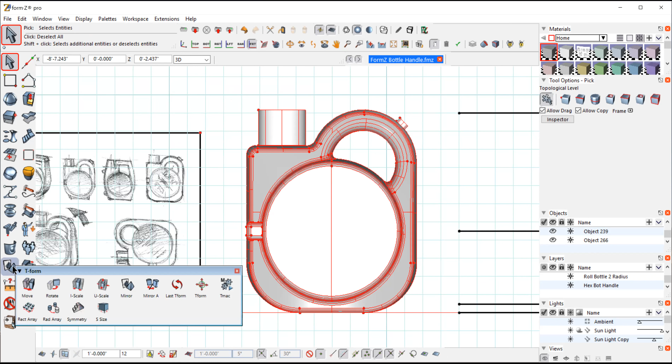So you can literally just sort of roll it forward and have an integrated foot area instead of trying to blend that into the side. So having this functionality turn like this. So we can have this nice, clean position when it's rolled on its side.

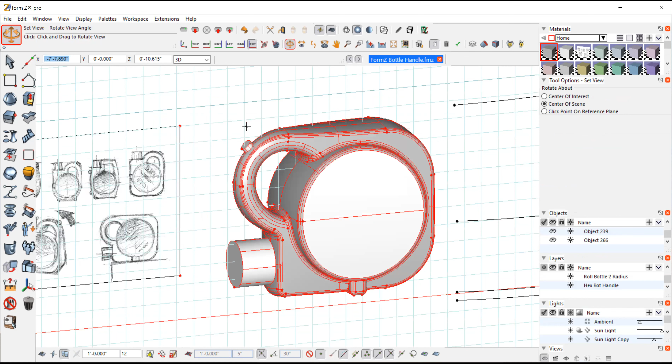And then the graphics, yes, the graphics would have to be addressed, whether they're on an angle to start with and they continue to remain on an angle as we turn it, or depending on how those graphics would be oriented in both directions. But it's a pretty nice design. It works pretty well because it's very difficult to integrate all of these features in the one bottle because a lot of things have to happen.

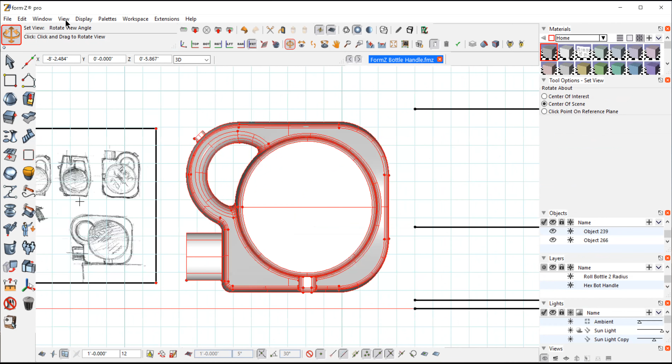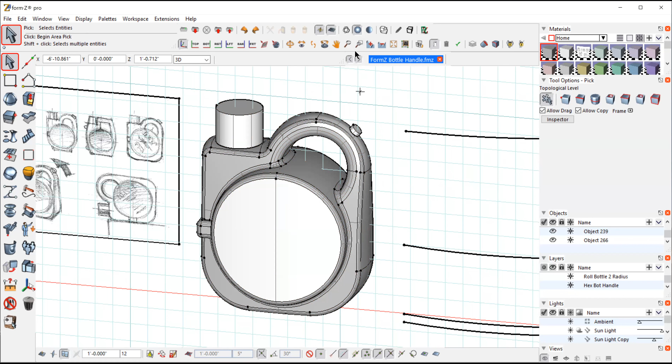Let me just bring this around again. So there's like 3 main things that have to happen. Obviously, we got to maintain this volume, which is hard enough to do as it is. We have our proportions I got from the category. So I'm following these proportions, roughly 9 or so inches wide, about 11 inches high, and about 5 inches deep, to try to get that to fit because it's a typical size for this 5-liter bottle.

So what we have to think about is the handle. The handle has to be grippable. It can't be a very large, wide, deep handle that integrates with the rest of the bottle. And then we have the area for the measuring cup, that plateau there where the finish is underneath, and then we have the pump. I'm not going to design that part. I just need to allow space for that.

And then we have our overall width, our 5-inch width. So all of these things are moving targets and they're kind of opposing one another because one part needs to be thin, other part needs to be wide. So it's kind of difficult to get all that to work.

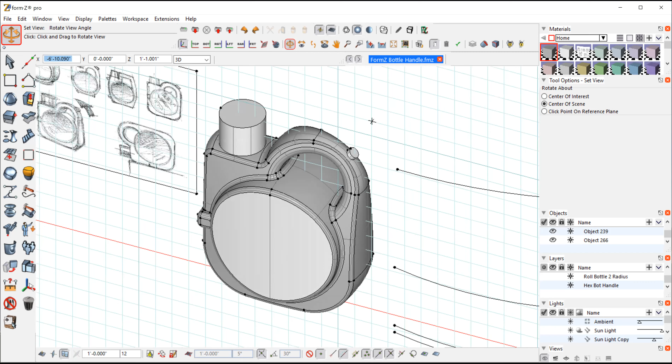So this particular approach, I'm building it in 2 sections. I have this center round kind of drum area, and then I have this whole outer frame, which is a different part. By separating the components this way, I can address some of these dimensions individually. Like I'm going to address the handle size and the finish area in one part, and then I can adjust this drum size to make sure I hit my volume. So working with these 2 parts makes it a little easier to work with.

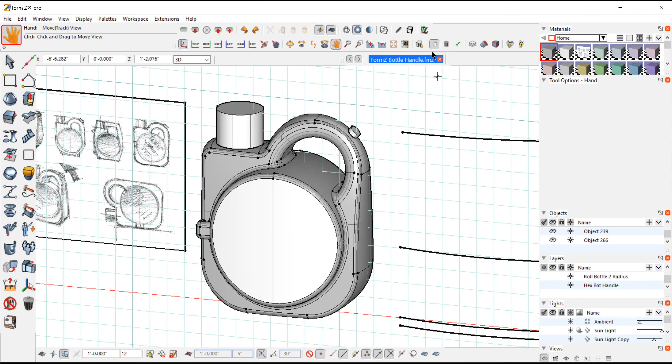So of course I'm starting off. I have my construction lines to create my overall shape. So I have that laid out over here. So here I'm starting just to do all the, like I said, I'm trying to maintain the simplicity by using these nice generous radiuses. So I started off with the handle.

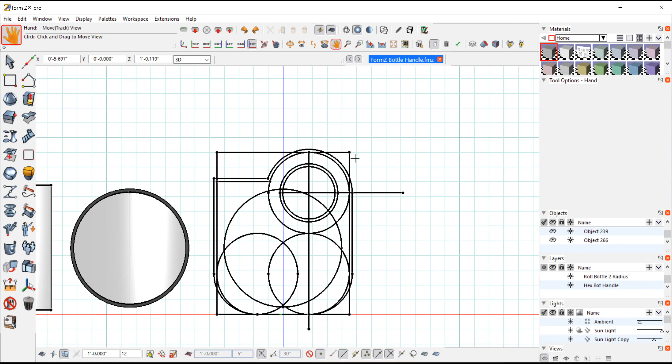From the front view, I wanted this round open handle. So I drew the outline of that circle, and then I drew the inside line for the clearance. So about how big that might be, 3/4 to an inch or so, and I'm going to do some radiusing to make that fit. So I started with that.

And then to maintain this circular theme that I have, I just brought down that exact same diameter on these 2 bottom corners to make those bottom corners the same diameter. And then I have my large circle in the center, which is going to represent that drum area in the middle, which will actually be a separate part. So that's just the beginning of the layout.

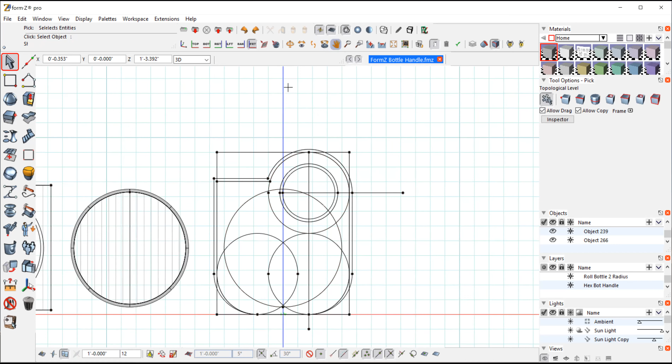So with that in mind, I go back to my 3D part after I have the 2D part laid out. And I know I'm working with that handle. So there's the handle over there on the left. So I'm trying to make this face for this inside part. So I'm going to loft that like I've done many other bottles, and I'm going to angle in that top one.

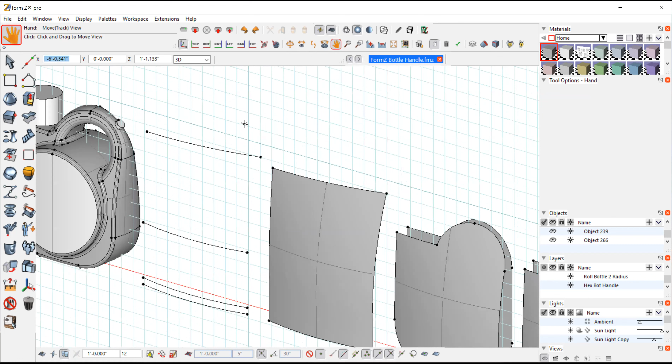You can see the top area here. I brought this upper right corner in very tight, so that's over by where the handle is. That's how I'm getting this slim area for the handle. On the top left, I'm trying to maintain enough width so I can get my measuring cup in there. The rest of them are just straight.

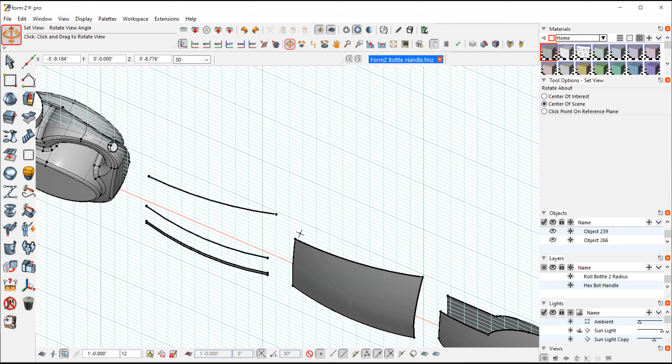So by lofting that, I can get this front surface. Again, selecting these in order takes a while, obviously it takes a while to get these into position. So a little bit of trial and error, going back and forth trying to get this lofted surface.

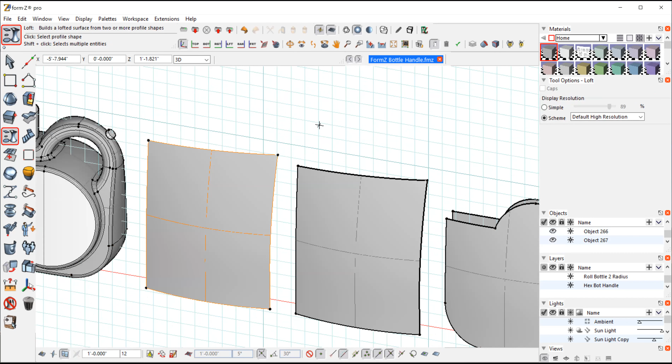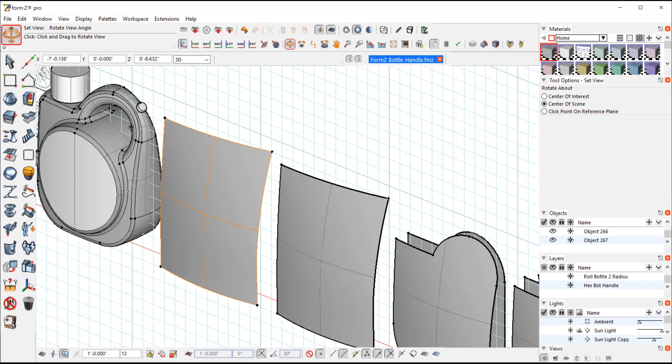I went to my tangent loft, and that's what created that first surface, so I have that coming up nice and straight at the bottom. I don't have to worry about this being a ruled surface because I'm not putting a label on this - I'm putting a label on the drum area in the section. So this is just about hitting these dimensions. I'm making it narrower at the bottom than the drum area, the maximum width, and that allows me to hit these other dimensions at the top much easier.

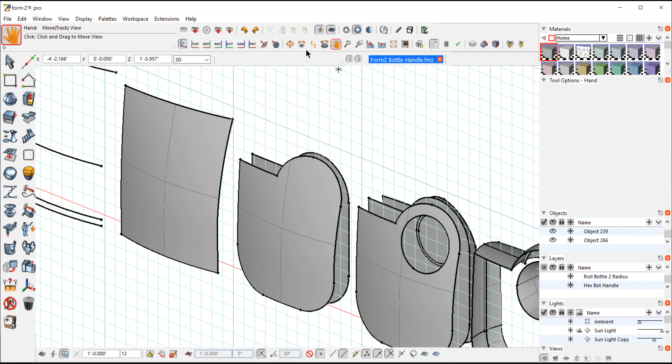Once I have that, from my line work I just brought over my profile and trimmed this swept surface with my profile. So I got my radiuses at the bottom, left this corner square, and then the radius for my handle. By taking that and mirroring it over to the back, I can start to see where my handle area is going to be. It looks pretty good. I can go in there and measure that, and I'm getting down to a nice dimension that would work. And of course, I also cut the hole in the center.

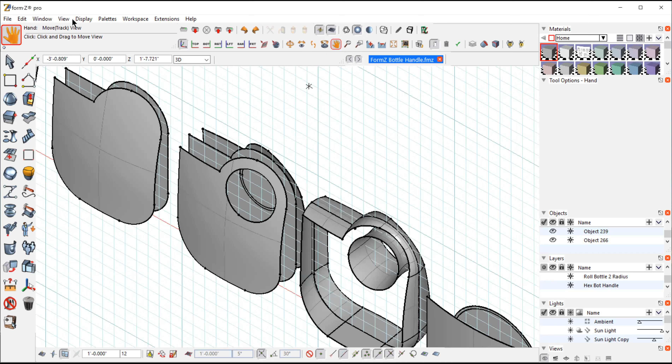Once I have all those parts together, it's a matter of doing the lofting to get our sides. Looking at it from the front view, I need to create that center line - so that's this extra line. I have the center part, which is the trimmed loft surface, and I just took my center line and created a 2D wall to bring that out. I probably brought that out about 180 thousandths, maybe 200 thousandths, a little less than a quarter of an inch, so I can get that nice clearance.

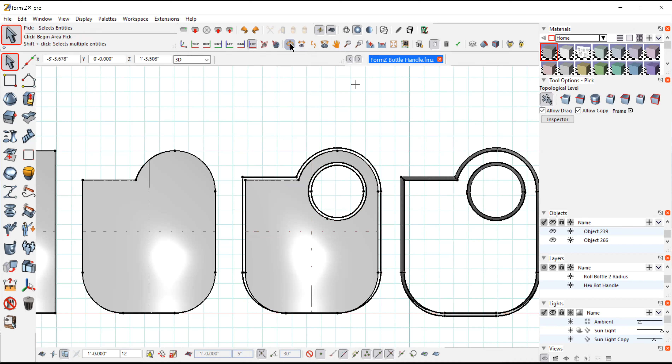So when I loft my surfaces, that gives me my draft angles and those soft edges, which are all here. I took the front surface off so we could see those. Again, the lofting of these is selecting these segments - that one from the front surface, that one, and then the one in the back, and then I just loft all these. I loft them individually so I can keep track of how they're doing.

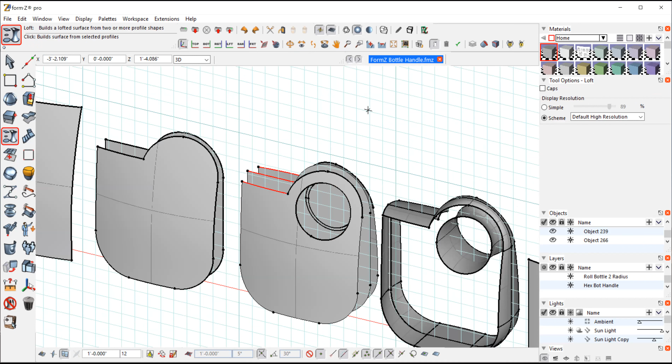So there's that lofted surface. Oops, that's not what we wanted. Why did it do that? We just need these three - I think I accidentally selected another surface down there. It keeps going to the back. Okay, so it's those three edges that give me that lofted surface that we have here.

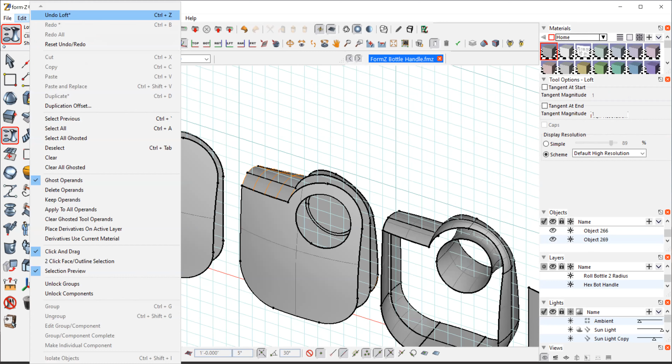And then obviously we do all the rest of them, get all the sides of the bottle. So we have all those lofted surfaces and the front and the back. If we bring those all together and union them, we have that center part completed.

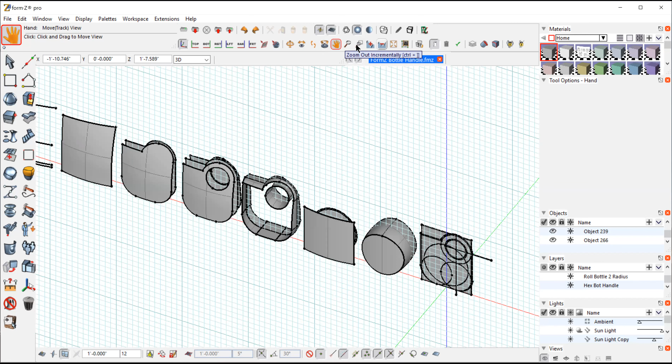So the next part is this drum area in the center. Again, I'm lofting the front. Now this is a ruled surface, so I created this surface in the front from just two sources, one at the bottom, one at the top, and then lofted that straight up. So now I have a ruled surface that I can put a paper label on. All I have to do is trim that and bring it around. This is a relatively straightforward part.

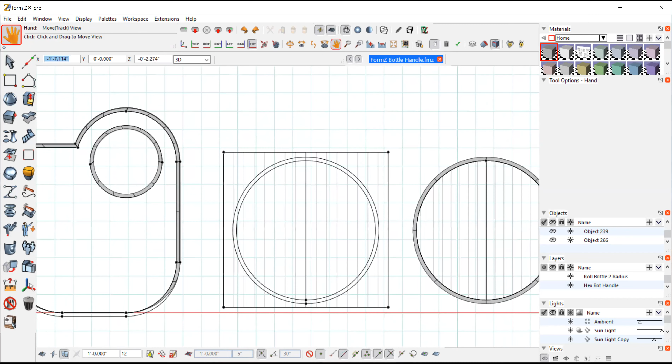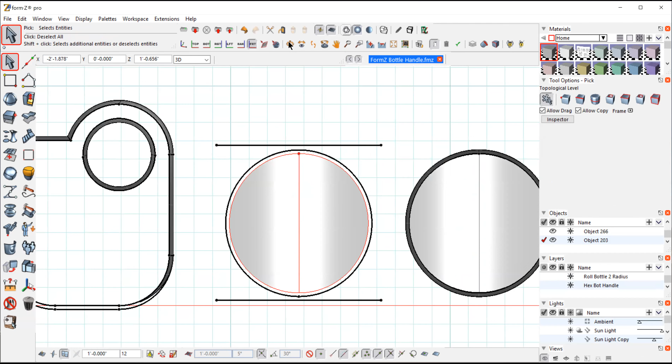So I'm going to trim with line - I'm going to select the surface and use the smaller inside edge and loft that. I'm going to take that part, which I have in position out front here like this, and mirror that to the back. One copy. And then there are my three sources, so I can just select these directly or just select the segments.

And that'll keep my face in the front and the back. And then all I have to do is stitch it. So I select those three.

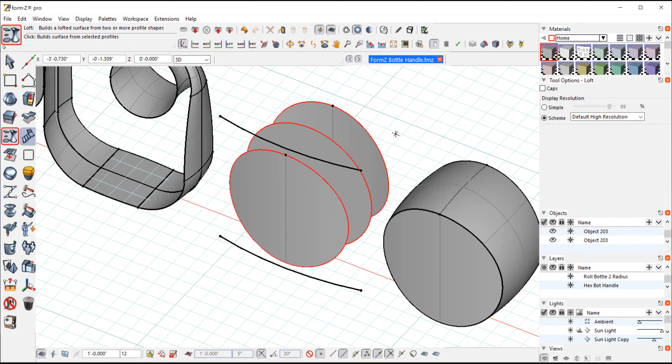Again, this is giving me that draft angle because this part of this drum will be exposed underneath the handle. I'm using that for the bottom of the handle. So then I loft those. That would go to the front and the back and stitch them all together, and that would give me the center part. So those are my two pieces that I have built.

So again, I'm going to leave all these here. I have all my steps nicely organized in case I need to go back and make some adjustments. So on another layer, I brought my two parts together.

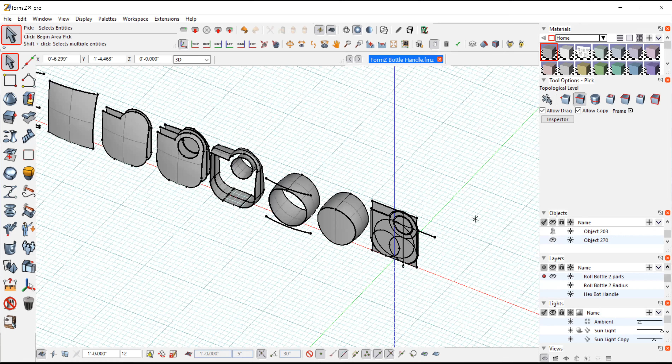And this is where I'm going to finish up the object. So here are my two pieces on the side. I have the drum part and this other part in the section.

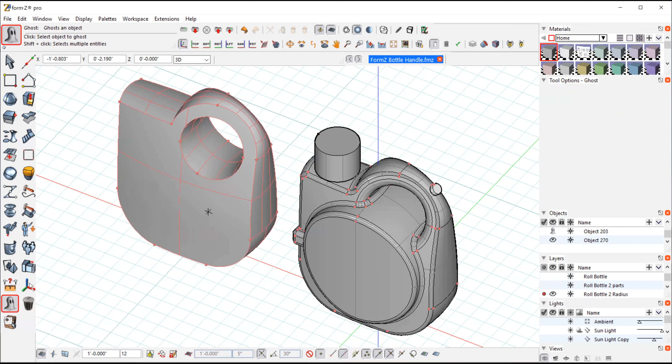So let me just ghost this. You can see, so I have my handle, I have the complete circle for the handle, but I made it large enough because I knew I was going to bring in this round drum to create the bottom of the section. I like the way that part comes through. So it's almost like this handle area is like a cradle holding the center of that part. Just kind of a visually interesting component.

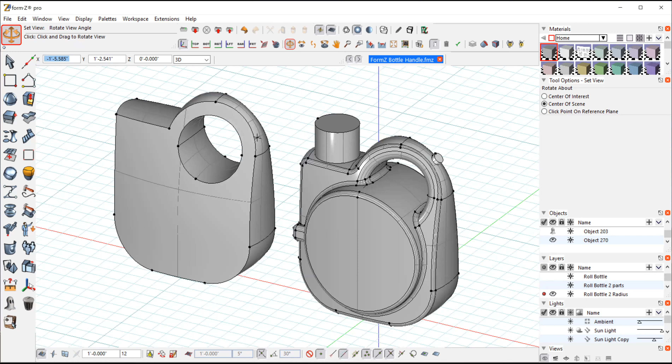So by doing that, I can make some last minute adjustments. Let's say if I'm slightly low or slightly high on my volume, I could just change the proportions of this drum part slightly. I can make it a little slimmer, a little bit smaller, slightly larger. I can do some fine tuning without going all the way back, because this other part worked out really well. That's just a little feature of doing this.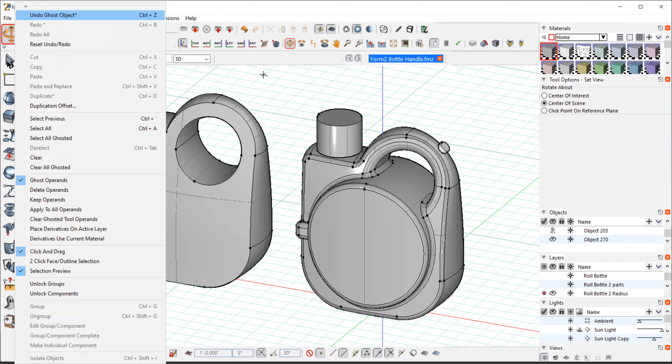So with the two parts together, all we have to do is union these. These are both solids. So if I select both of them and union that, this is where I can get a rough idea on volumetrics. So now this is all one part, and I can check the volume on that to see how that's going to go.

So the next step is this whole rounding, the radiusing sequence. This can vary. I'm not going to just click on the whole thing and say round radius it all at once. I kind of did it in stages. I believe I did this center one, and the handle probably is the most important.

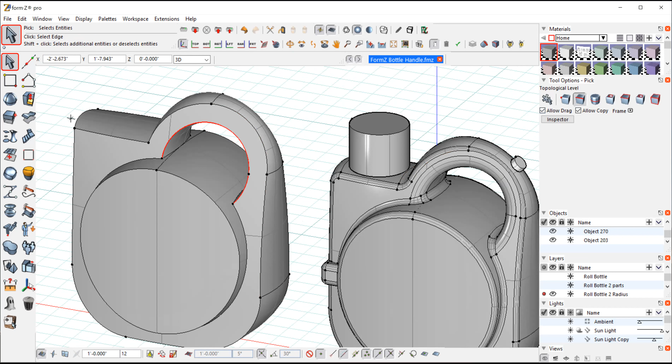Because I need to make that nice and soft, so it looks like I have a pretty generous radius in there. And I would do this on both sides, front and back. But let's just start with this front piece. It's probably a half inch, but let's see, that clears. That looks a little deep. It's hard to tell what I did last time together. It might be 3/8. Maybe it is a half inch.

So I'm going to grab, select the front and the back and do this all at the same time, because I am going to need to have that done back here. So let's try, let's go back. I think I did the half inch. That's nice and generous inside there. It kind of reduces a lot of that mass. So that handle would feel very nice. Yeah, looks good.

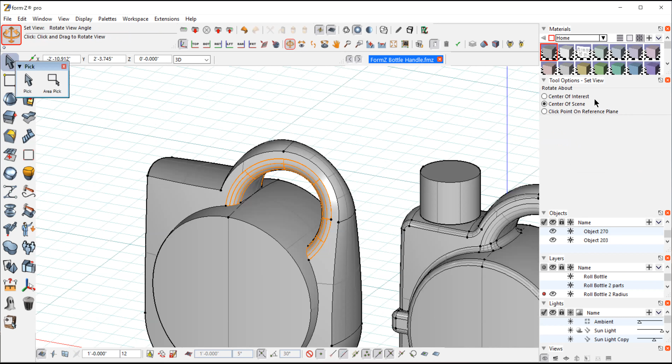Okay, so I am going to do the back of the handle, but this next sequence here, I can select segment sequence. And you can see this is going all the way around, around by the drum, inside, and to the other side all at once.

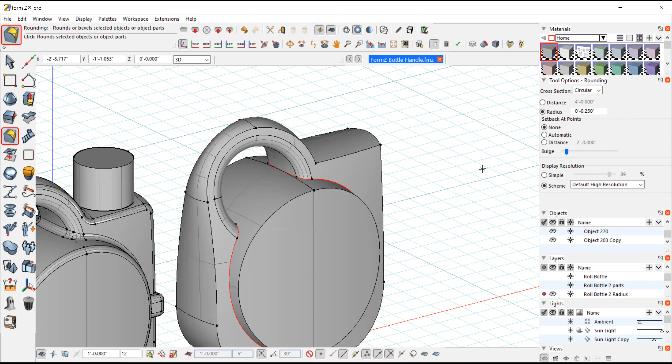This radius is a little less critical because our hand is not grabbing it, but I think I did a quarter inch. And now that'll fill in inside that hand. There it is, that's nice. So that radius, very nice. Yes, that's what I used. Yeah, it's a quarter inch. So we can see how this starts to come together.

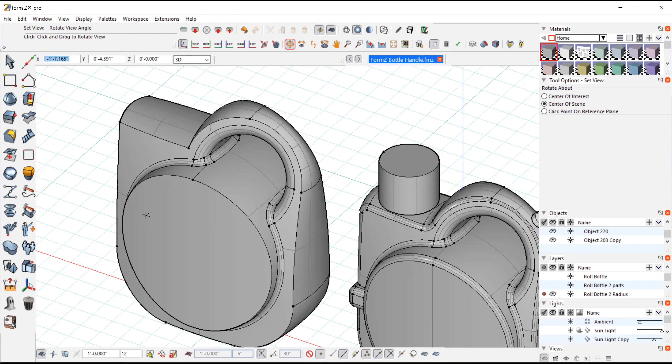The rest of these radius, I think I did a relatively big radius over here by the finish, which is probably not the best idea because we want all the fluid to drain out. So by putting this relatively large radius there, it makes it a little challenging to get all that to come out. But even at best, you still have to tip these forward slightly to get all the fluid out.

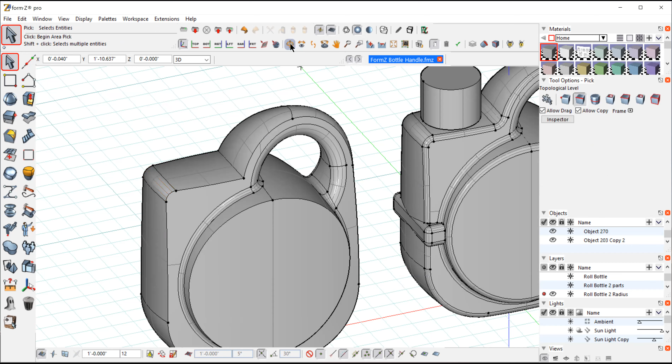See, I might have done 0.5. Yeah, that's about right. Also, the radiuses prevent dents and things like that. So it is a good idea to do that.

So this is just about done for this rounding sequence. Again, I can select all of these at once and in the back. And it looks like that might be a quarter inch also. So I have that on a half.

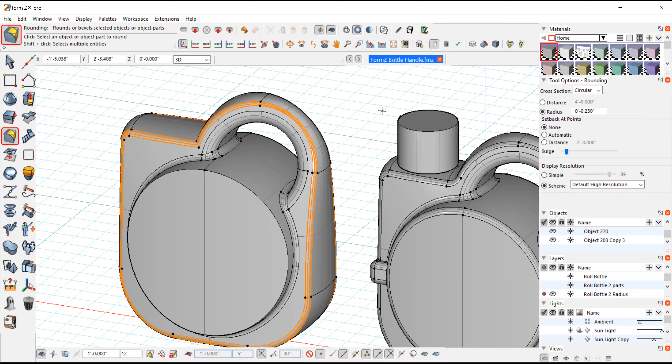Oh, I didn't do this inside. You can see this inside radius by the handle. I think I did that. See, I have a sharp edge in there, and over there I did that. I think I did that at a half inch also. But this is looking pretty good.

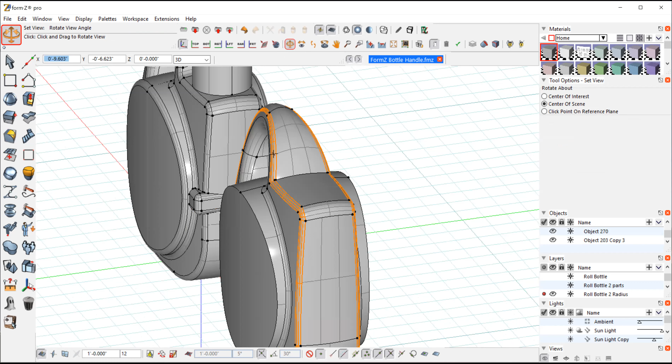And then, of course, the front edge of the drum area. And I showed it with the full label area. My label would have to have a little bit of tolerance, so I probably have to bring that in a little bit. Another little detail is I put this like this bar, this molded piece.

Now I have no draft angle on that. I have that straight across. The reason I did that is because that's going to provide some stability. It's like a foot. Now to have this local area with no draft, that should be relatively easy to get out of the mold. I don't want to do the entire side of the bottle, have draft angle on the rest of the bottle.

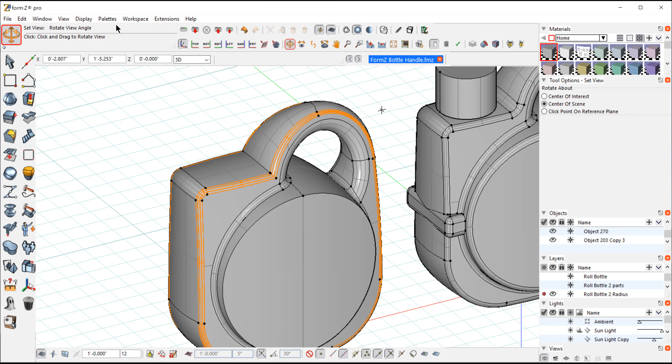So that should come out nice. But I made a very deliberate part there instead of trying to integrate that into the bottle. A lot of these large bottles, we get all these swooping edges and they're trying to integrate all these kind of stability issues. I took the point of view, I'm going to make it very overt. I'm going to put this piece here. Now put it right on center in the circle, so it actually looks like it's pretty well thought out.

So I think that turned out nice, having that right in position there. So that's it. So I think this stayed pretty simple, and it worked, and I hit my volume. So when I select this, I have, I don't know, I think like five and a quarter liters. So I have some space for wall thicknesses and also for some headspace.

So one little detail I didn't mention is this little vent knob. Most of these large bottles have a full screw cap over on the right-hand side, on the opposite side of the cap. Because what they try to do is get the handle and the measuring cup and this other vent cap all to line up.

Because these bottles are extremely heavy. So when they put these in the cartons, the corrugated cartons, and they put them on pallet packs and they stack them, they could be stacked 5 or 6 cartons high. The bottles at the bottom really have to hold up. They cannot break down with all the weight on top of them. So they try to, especially with these big heavy bottles, they make this line.

Smaller bottles, they can get away with that. They use some fillers and then they're not as heavy. So they don't necessarily need to make the handle line up with the cap. But in these large bottles, it's imperative that they do that. So that's why we have our handle protruding up and lining up in the measuring cup.

And then I have this little vent cap. My little vent cap is much more insignificant because all you really need is a hole for air to get into the bottle so it doesn't glug, and then the tap cap will work. So I've seen bottles where they just have like a molded little protrusion there that you cut. You just cut off the little bump, or you poke a hole in it just to get some air. So it's just one way of simplifying that little feature.

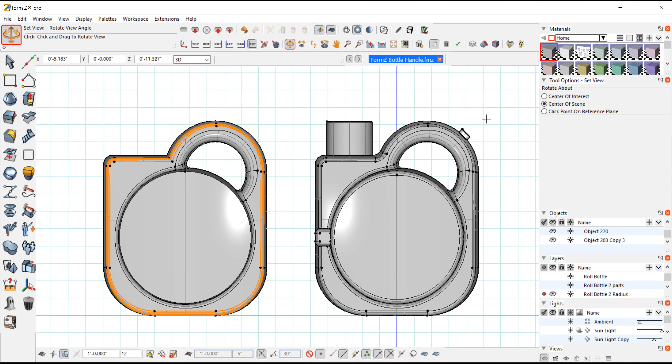But I am pushing the boundaries a little bit on some of those technical features to come up with a design that aesthetically is very pleasing and it's very functional. Okay, so that's it for this tutorial.